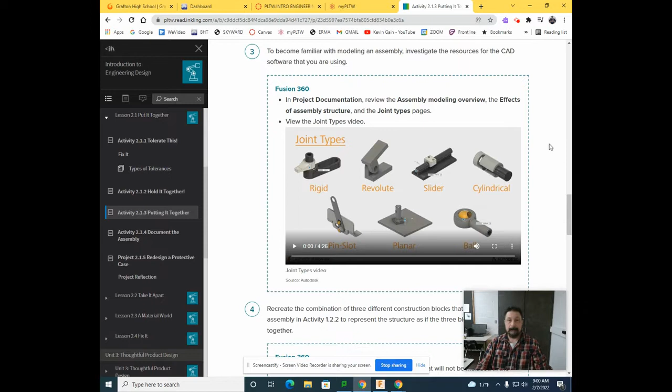I'm going to open up my Fusion where I already have my blocks saved. I have them saved under Home in my course files for the project, and then in a new folder, Assembly Blocks. Now, when you start a new file...

If I hit the little plus sign here, I have Untitled 1, I'll close Untitled. You can't start bringing your blocks into your drawing until you actually have this saved. So what we need to do is hit Save, and I'm going to save this as Assembly, location in my course files and Assembly Blocks. Select Save. So now it's saved as version 1 for assembly.

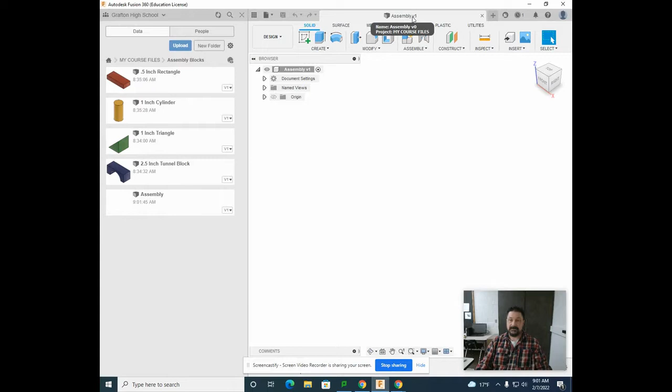So if any changes need to be done to the blocks, you can do them in that file and they'll change within the assembly. Pretty sharp technology.

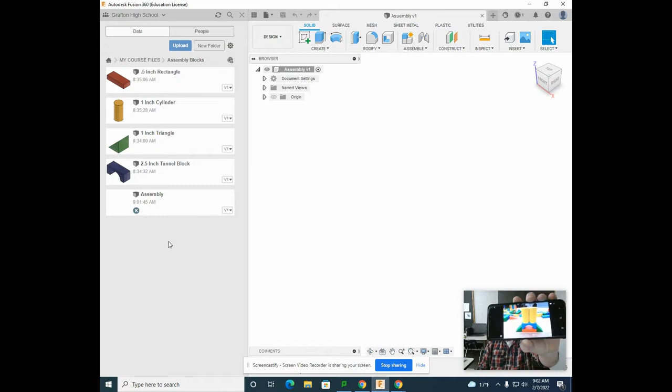So right now, I'm going to have to refer to my picture that I took. Looks like I have the first one in my picture as the red block on the bottom. So I'm going to click and hold my red block and bring it into the drawing and drop it.

Where you put it currently is just arbitrary, it really doesn't matter where you put it. I'm going to select OK and not worry about where it is within the X, Y, Z and so on where I put it. What I do want to worry about is grounding it.

Currently, I'm just kind of clicking or wheeling around, clicking on my wheel, panning it. If I click on the actual rectangle block, I can move it around, and that's a good thing for right now. However, you do want to what's called ground it, keep it in one spot so it will not move. This is what you're going to be basing your assembly off of.

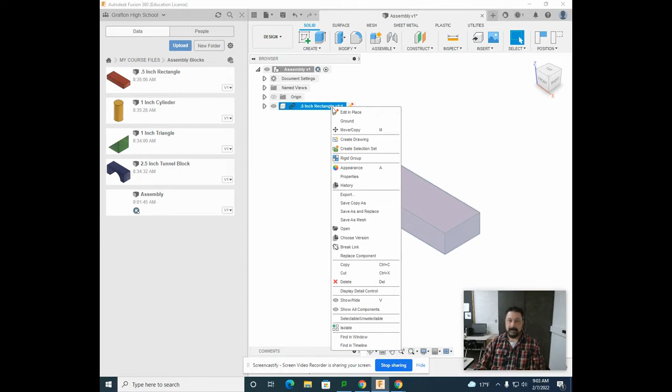So if I come up over here into my little tree and I select my 0.5 inch rectangle, select my right mouse button and select ground, now you'll have this pop up. We can just hit capture position, basically saying this is the spot that we wanted, and then I just left click in my screen to reset.

Now if I click and hold with my left mouse button, nothing is happening. It is grounded, it's staying right there. So within my isometric view, that cube that I have right now, that one's fixed.

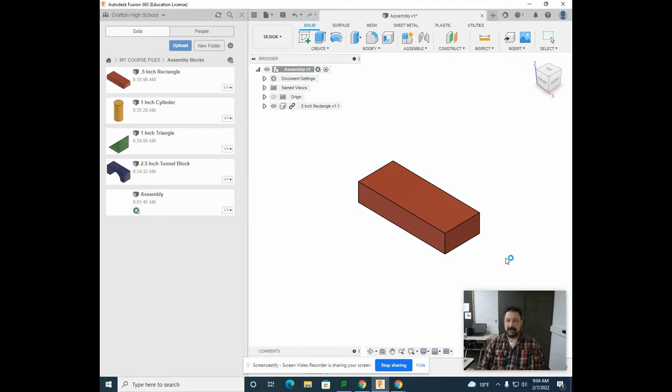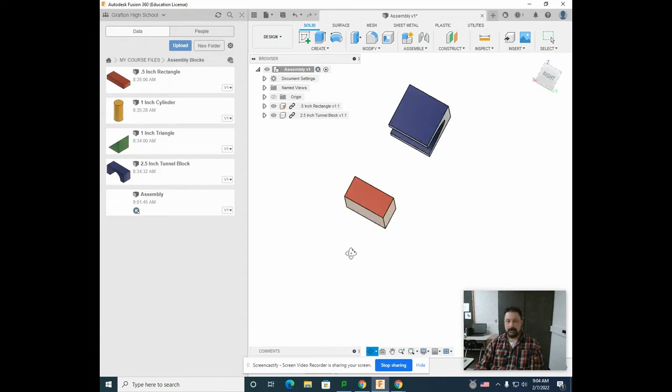Okay, now the next one I'm going to bring in the tunnel block, and I'm going to click, hold on my tunnel block and drag it in. Now it's going to lay it, in this case, above the spot. You can move it anywhere you want, it really doesn't matter because you are going to use the assembly to put it together. So right now I'm just going to hit OK, and I'm going to use my orbit and just kind of see where it is floating. I'm going to go back to my home.

Now I can come up here and underneath this symbol, select joint. There are a lot of different joints I could go with. Currently, the easiest thing is to use the one called simple. For my component 1, that's highlighted right here, my tunnel block, and the snap select is already highlighted.

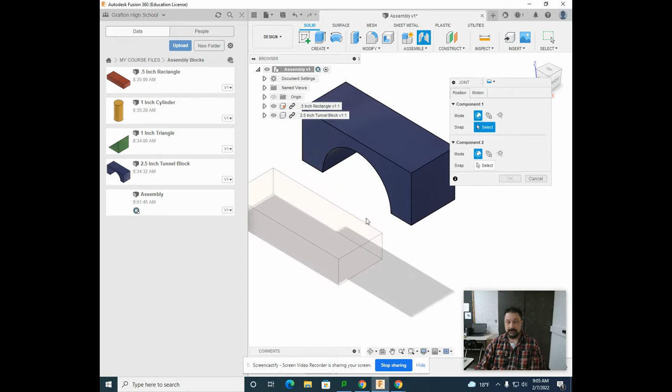Now where do I want to pick this up and where do I want to put it? I have to anticipate exactly where I'm going to pick this up and where I'm going to put it. You can see if I hover over a face, other areas pop up. My little XYZ coordinate system also pops up. You can see it wants to snap to specific spots, and it will ask you, if I just select the face, along that face, which one do you want?

So it's probably a good idea. Same thing with the edge. You can see the edge here. If I click on the edge, it's going to want me to pick one of those points along the edge. So if you can, just go ahead and pick one of those points immediately.

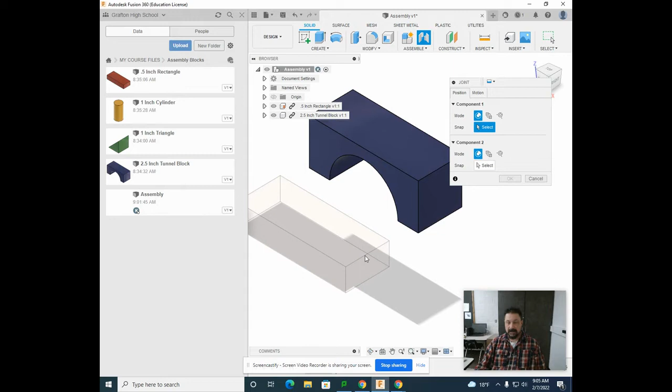For this one, I do want to highlight the midpoint, and I want to pick. Now it defaults down to component 2 for a mode, and snap, I want to click on that midpoint, and you can see it automatically moves pretty sharp. Now currently, that's the only spot that it's selected.

Now it is what's called a rigid. So just like anything that you draw, a little pop-up menu, in this case assembly, comes up. Now the motion of it is in that little pop-up menu. The degrees are right here.

I could also move over to this tab and you can see the same motions are here. So either here or here, and you can see once again the position, the degree here, angle, it's right there.

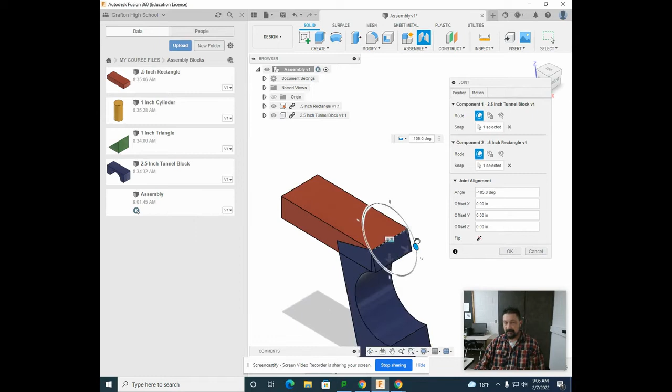You could also do a little free form here and go, well, maybe I want it like this, upside down next to it. And you can see if I put negative 180 degrees, it would turn flat. But I think I'm going to follow my picture and keep it at 0.

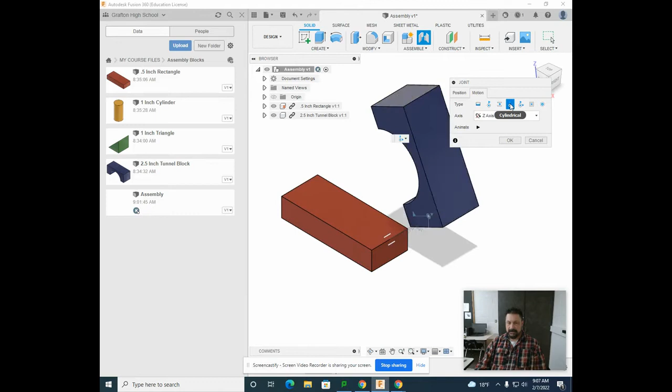If you want to mess around with the other types, right now it's going to stay there. It's rigid, it's going to stay. If you select Revolute, it'll actually give you a little animation on exactly what Revolute would do. Same thing with the slider and what it would do. Cylindrical, pin slot, planar, and ball, which is pretty much everywhere.

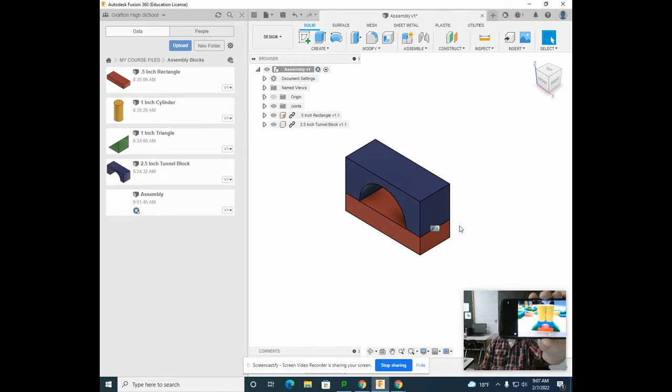But currently, I'm going to keep it rigid, so it's going to stay there, and select OK. Now I got to see what else I did, and maybe I'll do my green blocks next. Okay, nice easy one, same thing: click, hold, drag.

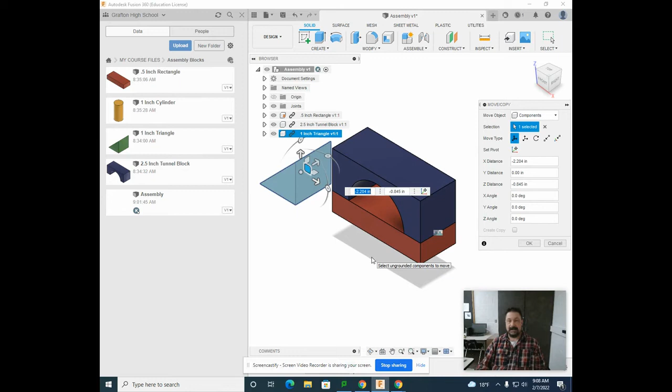And I'm going to kind of get it out of here. Now, this is where some of you might go further and go, I got this. Absolutely, you bet. If I select OK on this and go back up to my assembly and select joint...

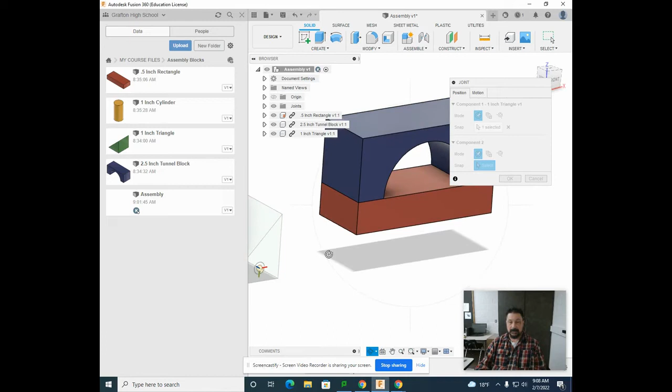For my midpoint here, I'm going to get into my orbit, select escape, and pick my midpoint there, and I'm going to keep it rigid and select OK, and there we are.

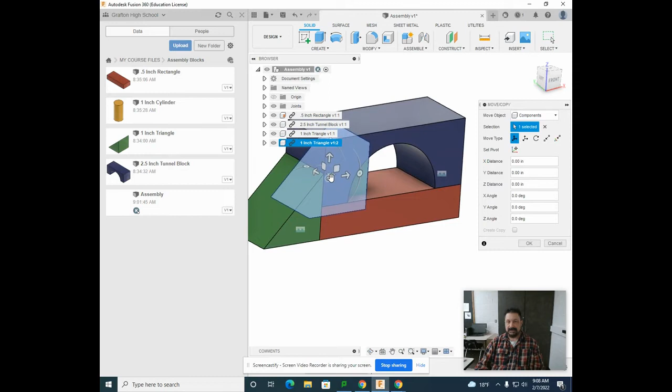Now, once again, some of you might jump ahead. Totally fine. If I click here and drag this in, now I'm at the point of it not being rotated the way I want it. So now this is where it'll come in handy with some of those other components for assembly.

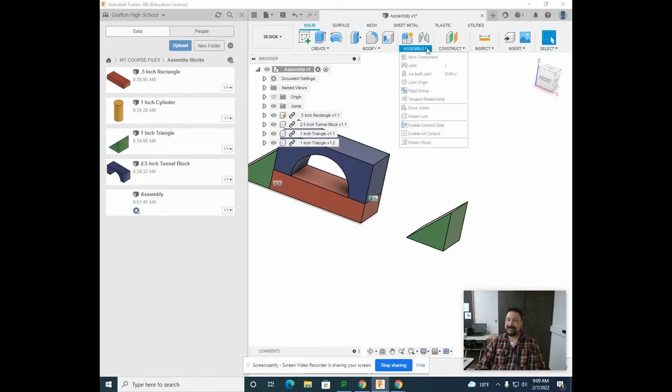So if I stick with where this is, just hit OK, and I select my assembly and then select joint, and I still want to maintain this midpoint here and this midpoint here, but now I need to spin it around. So this is going to be a good one to tinker with and see exactly what's going to be used.

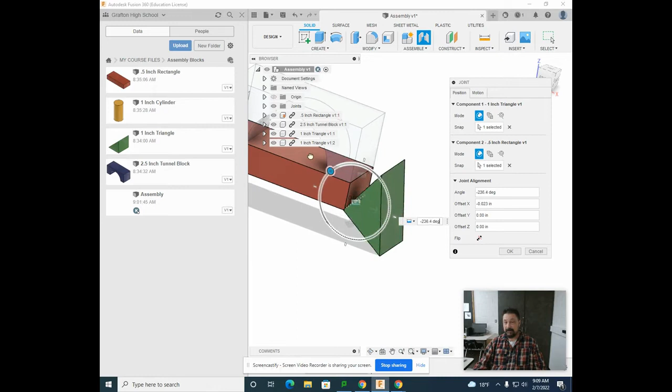Obviously, I can't do it this way. I could do it this way. It's fortunately in that realm of a symmetrical object where I can spin that around or mirror and enter 270 degrees.

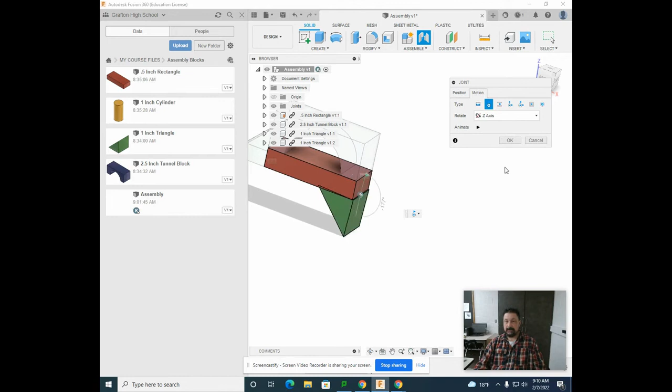The motion, it might not be a bad thing to maybe use one of these other ones to kind of spin it around. Maybe Revolute would work, and I could.

Looks like we're going to stick with this. Now I could also spin it around by means of using the XYZ. Oh, I could flip it. I'm sorry, flip it, okay. A lot of different options that are there.

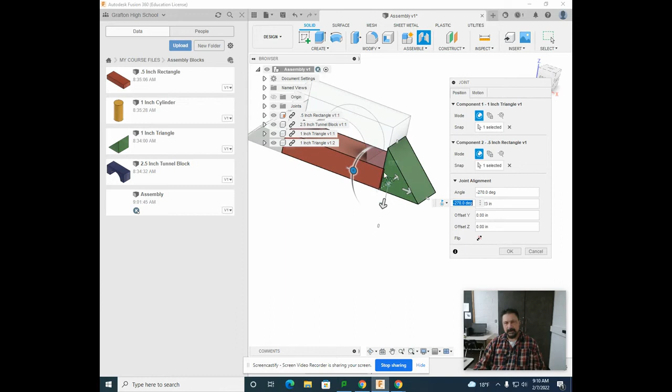So I'm going to, because now I'm looking at this, I need to hit a 0 on that. Looked like it was a little bit off. Okay, I think that's how I'm going to approach that one.

Now if I see that I had kept this joint in there, I could change that and edit joint. So all I did was hit my right mouse button on it, and I'm going to stick with the rigid, keep it in there. So just like any drawing, you can always modify.

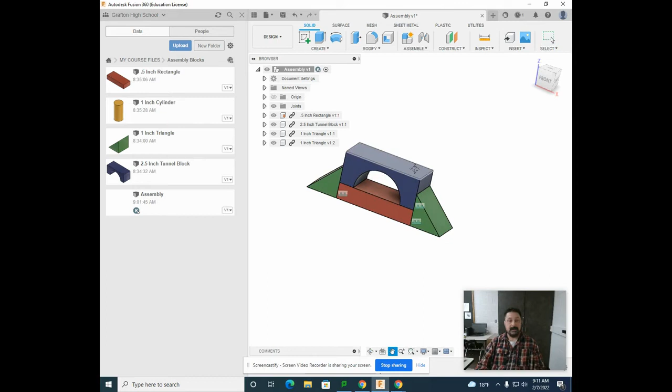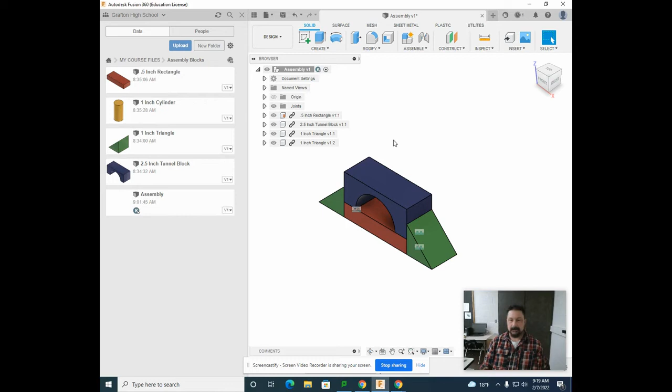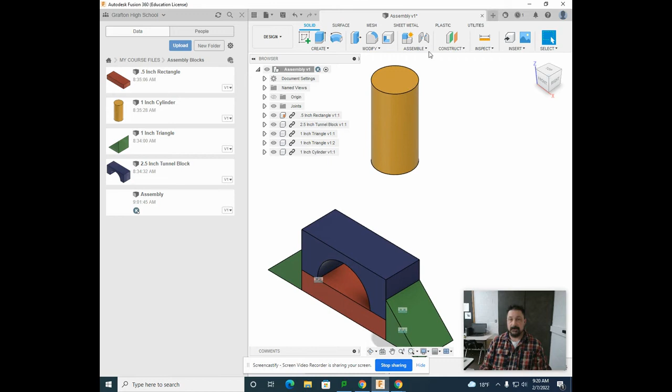Once again, it's more about the experience of getting these blocks together than getting down to the exact measurement of the blocks. So if I click, hold, and drag my cylinder out, I'll put it up here out of the way. I'm going to anticipate selecting the bottom and putting it on the top, then do an offset one way or the other, trying to figure out a fair distance, but using that distance nonetheless to make it look like my photo.

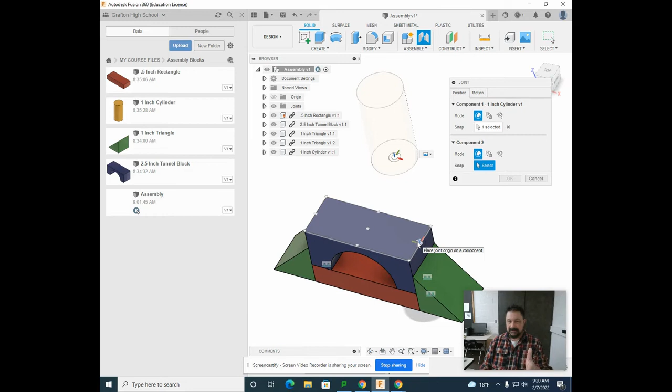If I select OK, same thing, go back to my assembly and joint. I'm going to wiggle this around - my first selection in the middle there, my second one I'll wiggle down a little bit, and make sure Z is pointing up. Then click, and there it is. I'll use my orbit. So before I exit that out, let's say you did - escape to get out of the orbit. If I select OK, obviously that doesn't look like my drawing.

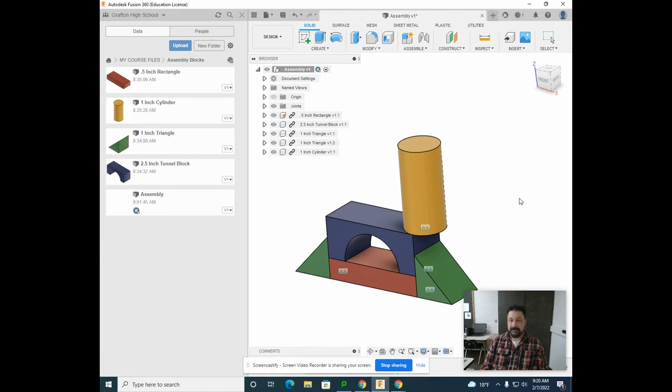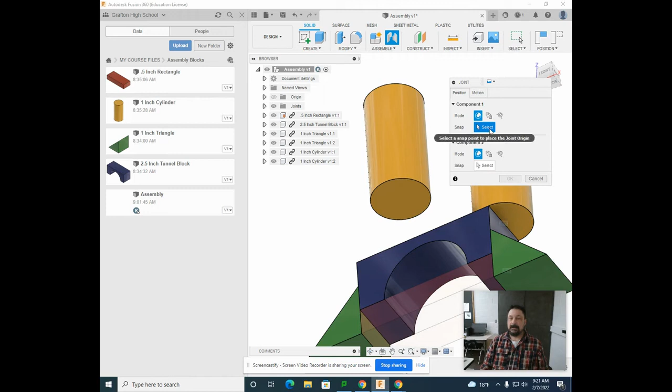Tell you what, I'm going to bring in the other cylinder. We'll do the same thing - scoot it up, assemble joint, go around so I can see the bottom. Assemble joint again, select the middle there, wiggle down, escape out of my orbit, click there, and select OK.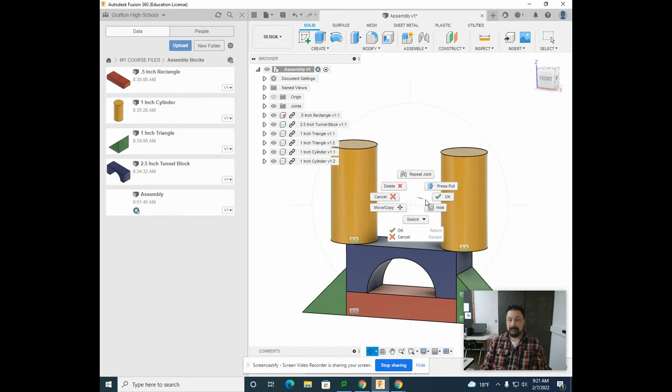So I have 2 cylinders that obviously do not represent my photo. I'll go back down into my tree here. The assembly, this joint - I'm going to hit my right mouse button, select that one, and choose Edit Joint. Now I want to scoot it this way, and it looks like the offset is going to be about 0.5.

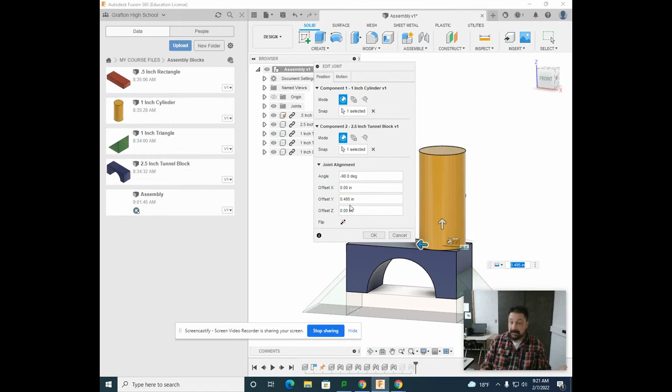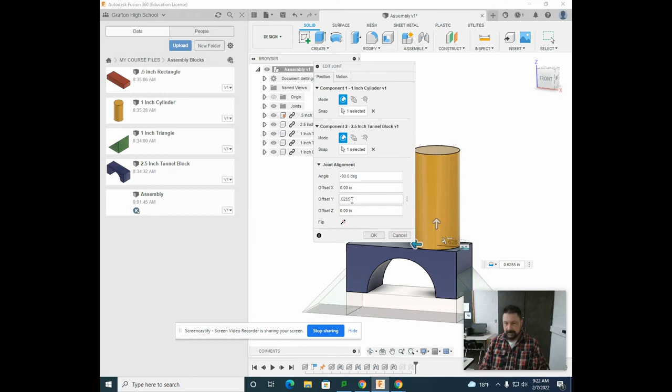So regardless of whether I have it right on the edge or no separation on the inside, I could do 1.125, 1 and 1/8, 0.5... yeah, 0.625. Have that just barely off the edge, and then the other one will be centered.

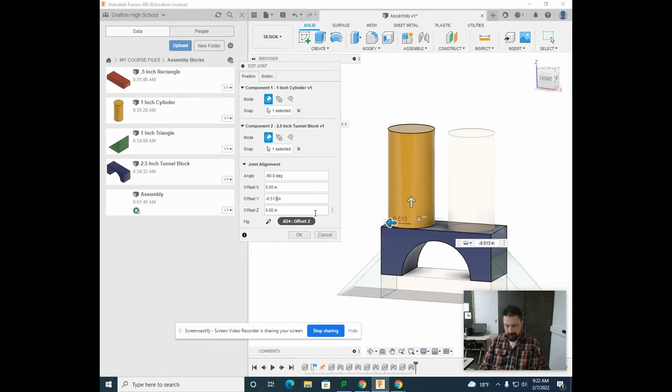This one is going to be my last joint - edit joint, same thing. This time I'm going to wiggle this way and type in a negative 0.625 and select OK. So it doesn't totally match - if I go to my front view, you can see there's a smidge of an offset on either side and a gap in the middle, but it's a fair representation with fairly decent measurements given the rounding.

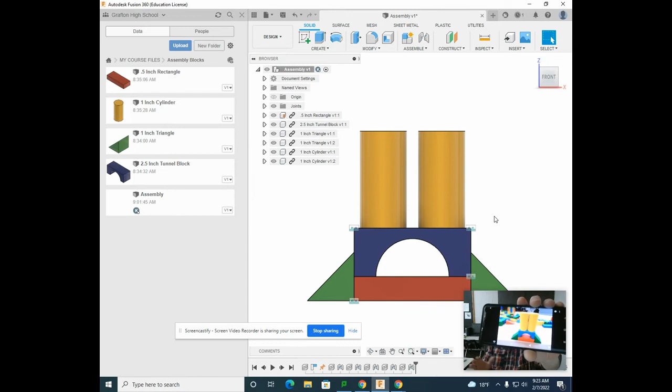Don't have to get exact once again. And I have my assembly drawing done.

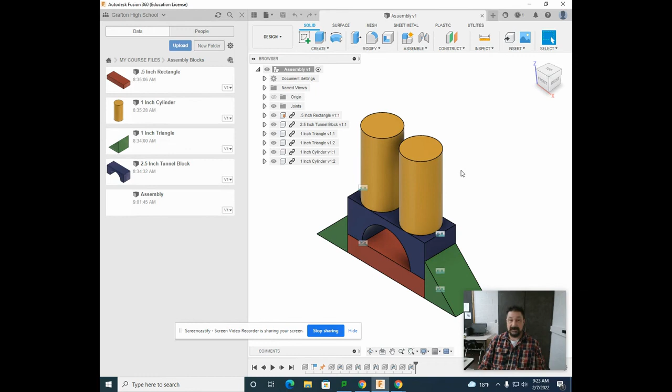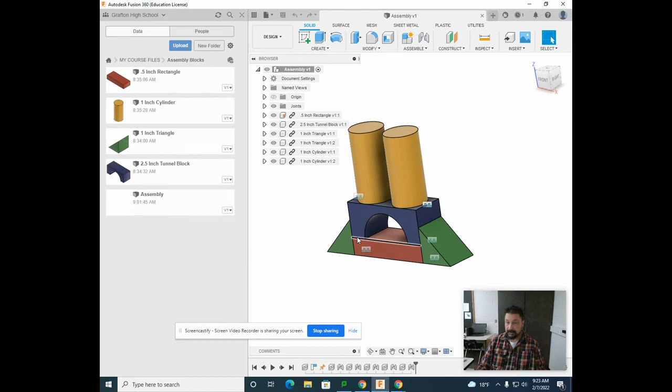From this point, what I need you to do is save this - save as the assembly in your course files. From here, I'd like you to export it because I need to be able to manipulate your file and look at your drawings. If they're all rigid, that's totally fine. But what people do is try to just put things in position to make it look like how it was stacked, and unfortunately when there's a little bit of orbit, one's floating one way or another just because of depth. So I need to check that everything resembles what you sent me with the picture.

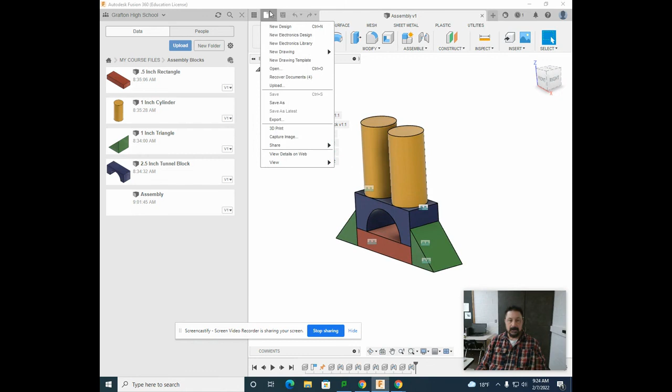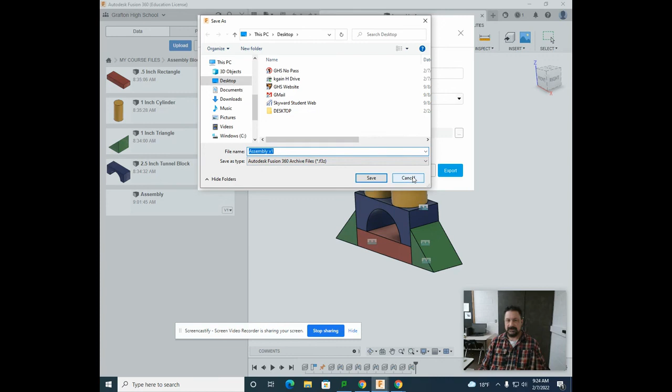So we need to go to File, Export, and name it Assembly. We can save it as a Fusion 360 Archive file. Make sure you know where the location is, and if you don't like the location, hit the 3 dots. I always put my stuff on the desktop because I know it will be saved there, and it's a nice easy way to pick it up and submit it to Canvas, so you're not fishing around all over the place for it. If I select export, it's exporting onto the desktop.

And then I will go into the Fusion, and under 2.1.3 in Canvas is going to be your assembled blocks. This is where the picture goes, which we already did. This is where your picture goes for your 6 block stack.